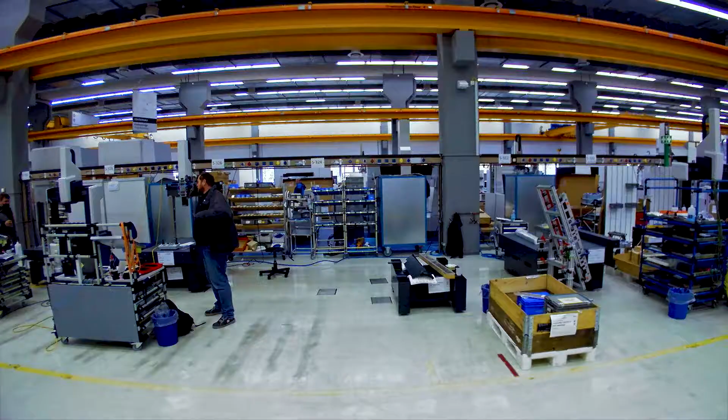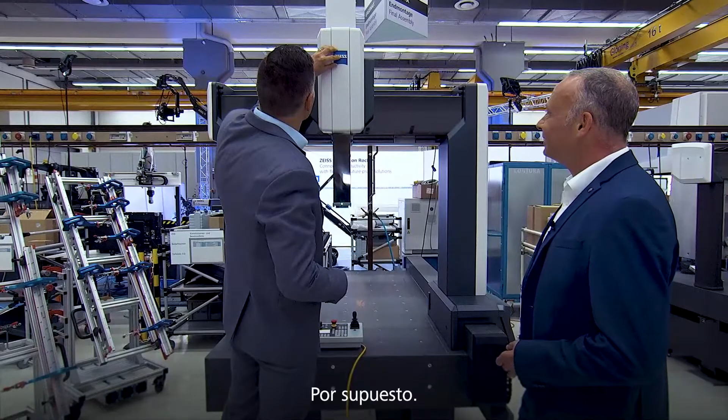Wow, pretty cool machine, I'd say. Yes, but a detail is missing. All right. Oh, you are right. Can I do it? Yeah? Sure. Cool. Yeah, now it's perfect.

Hello, everyone. I'm here with the person responsible for this assembly hall, Mr. Alex Pichinets. Hello. And we're standing in front of a machine that we have just seen being built in a time-lapse video. Alex, what machine is this one? This is a Contura. This is one of the top seller machines that we build for the European market and send out to the customers.

And as we are standing inside an assembly hall, what assembly hall exactly is it? This is the assembly hall in Oberkochen, at the headquarters. And how many of these machines do you produce inside this assembly hall? 60 per month. Not bad at all. And what makes this assembly hall so special?

Oh, they have a special environment that allows us to build this kind of machines, with a special temperature and humidity. Okay. And what was the biggest project for this assembly hall? Oh, I think this was last year, making it digital for the workers and making it paperless for the workers. They now have the possibility to do all the things with digital tools here in the assembly. All right. So you kind of optimized the production, right?

Right. And speaking of production, the whole production team of our Innovation Rocks is waiting for me in the studio, so I have to go. Thank you very much, Alex. Be a pleasure. And you guys, you come with me.

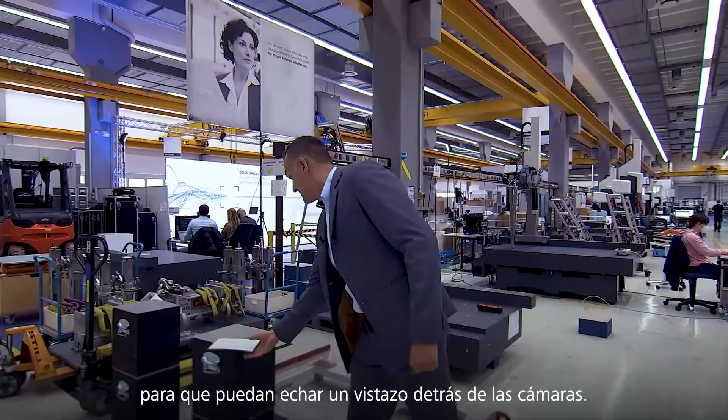So now I'm on my way into our studio, and it's cool that I can take you with me so you can catch a glimpse of what's behind the scenes. My cards are ready. I am ready. Let's check if all the guys over there are ready. So hello, everyone. How are you doing? Good? Perfect. You guys are ready?

Well, ladies and gentlemen, welcome back to the spring edition of ZEISS Innovation Rocks 2021. My name is Pietro, I'm your host, and this is rock number 2. Yesterday, we kicked off this year's edition by talking about a completely new level of simplicity in CT technology. I hope that you enjoyed both the show and the webinar.

In this rock, we will talk about quality assurance, which usually is part of production processes, as basically everyone needs to ensure the final quality of their products. But sometimes this very step can turn into a bottleneck. In this show, along with our ZEISS experts, we will learn how to use quality assurance to our advantage. And of course, a series of interesting demonstrations won't be missing either, with our demonstrations master Jay, of course.

The title and the topic of this rock is 'Unleash Hidden Efficiencies in Manufacturing Processes,' and my guests will explain how to achieve exactly that. So let's welcome the first one. He is the head of product management. Please welcome Maximilian Wiedemann.

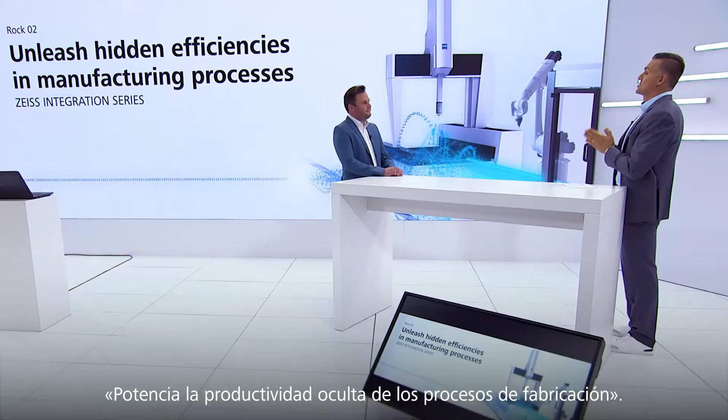Hello, Maximilian, and welcome to the show. Hi, Pietro. Thanks for having me on the show. I have just mentioned the title of this rock, 'Unleash Hidden Efficiencies in Manufacturing Processes.' Basically, what exactly does that mean?

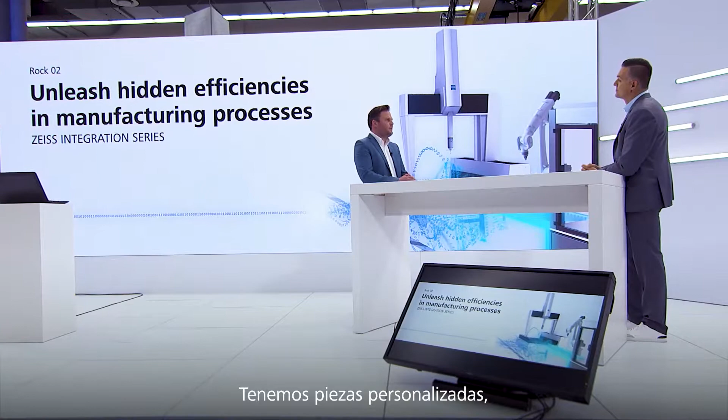Yeah, Pietro, if we compare the production processes that we have today to the ones in the past, we see a huge difference. On the one hand, we have a trend towards individualization, so we have customized parts, configurable parts like you see in cars or even in the medical sector. We nowadays produce parts that specifically fit your personal body. And on the other hand, we have high volume series production with maybe a requirement of 100% control, like we have in the medical sector. So this requires that quality assurance is flexible, but also very fast.

So this means we need powerful measurement equipment, that's for sure, no doubt about that. But if we talk about integrated quality in production, we really strongly focus on the processes around it - how is a part being loaded and how do we handle the respective data? All right, well, makes sense. And I know that you have brought a little sneak peek. So let's have a look together.

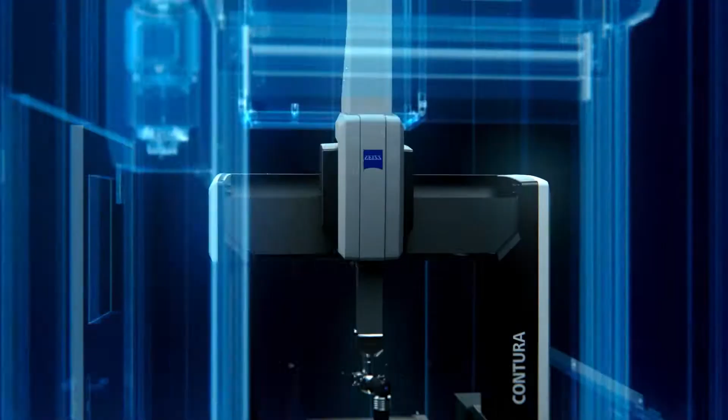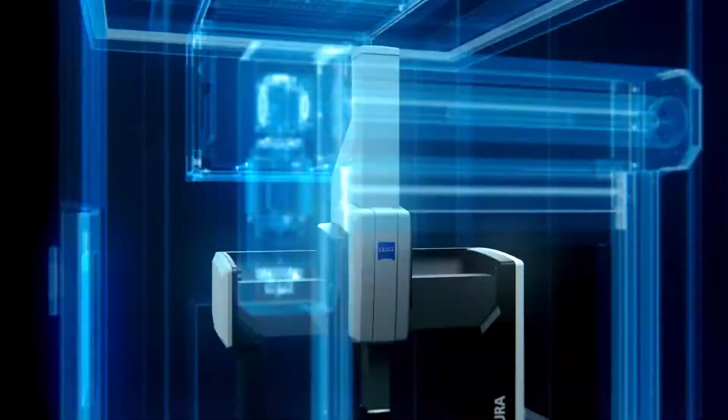The ZEISS Integration Series and the integrated quality it provides.

What would you say is the main benefit of it? With the ZEISS Integration Series, we bring the production world and the metrology world together, and this gives huge benefits to our customers. We significantly reduce the measurement cost per part. We give direct feedback of the results into production, where we're also able to automatically compensate the tooling machines, and we prevent rejects and rework. That gives a huge benefit in terms of sustainability. Summarized, integrated quality is a multiplier for added value.

All right, well then let's have a look together at what all of this looks like.

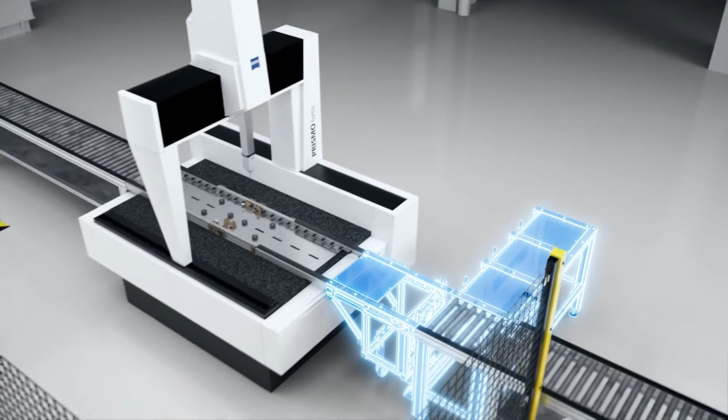Efficiencies unleashed - nice claim. Maximilian, what exactly have we just seen in this video, and what exactly is the ZEISS Integration Series? What we saw in the video is how inefficiencies can appear basically everywhere, in the metrology room, at line, or even inline.

And we provide solutions for our whole product portfolio, for CMMs that can directly be installed in the production area and also in the metrology lab. All of those CMMs, like the Duramax, the Contura and the Prismo, and also our entire optical series, are used because of the specific technical demands of our customers.

It is split into basically four categories. The first one is the loading category, that contains all loading systems, manual ones or automated ones. Then we have the operating category, where we find all products in order to efficiently integrate your systems and the data at the place where it's needed.

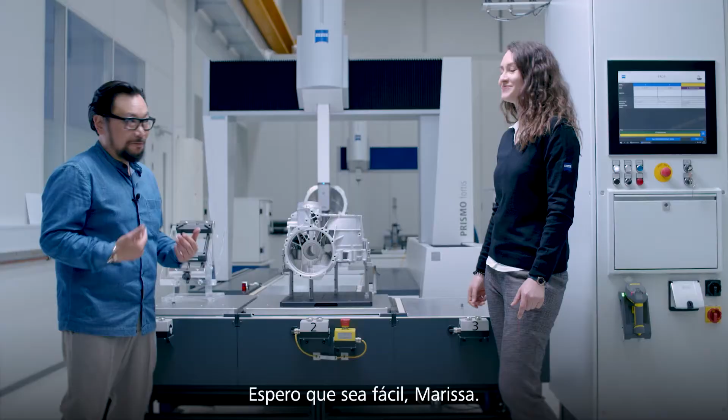Okay, this better be easy, Marissa, because... Yeah, I think you will manage. So we just tighten it a little bit, right? All right, looks good, okay, it's in. How do we put it in the queue?

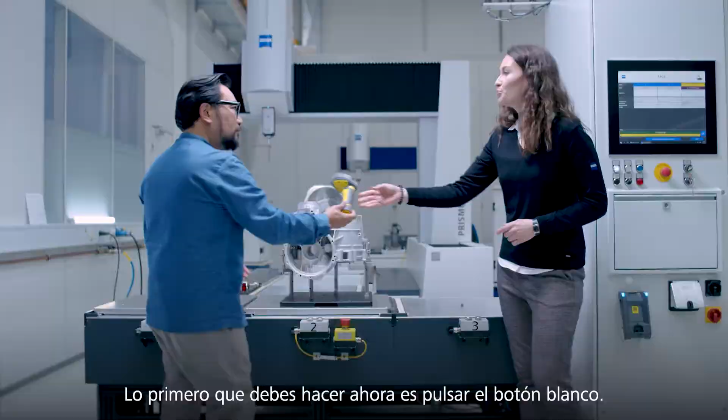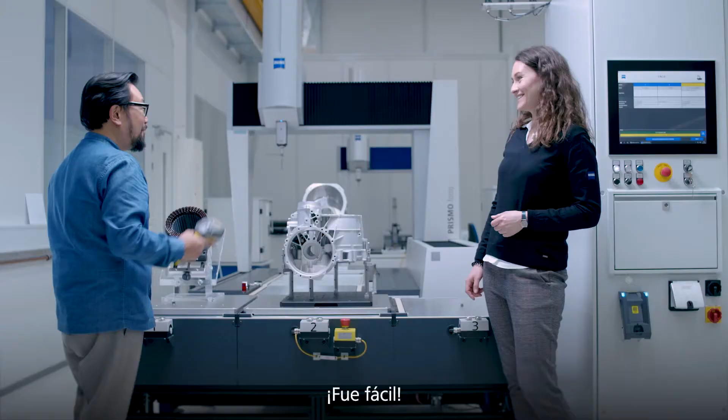Now I will give you the scanner. Okay, first thing you have to do is push the white button, then scan the DMC code, and then push the white button again. Well done, and that's it already. It's in the queue? Yeah, that's it. Wow, that was easy enough for me to do.

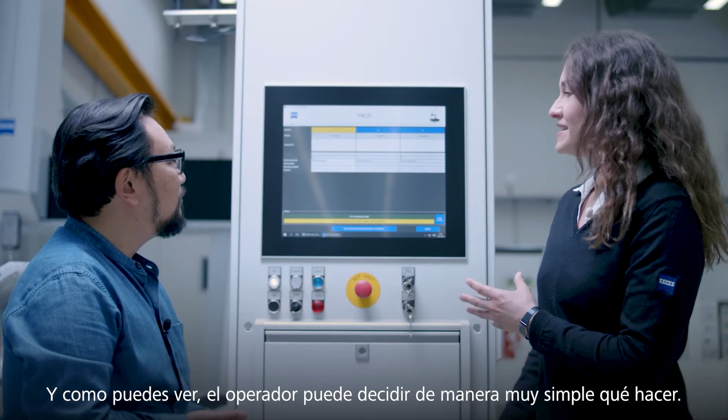What else can we have a look at? Yes, of course, the software, if you have a look here. So we have FACS, it's the HMI for the system. And as you can see, it's really simple for the operator to decide what to do. So we have first, second and third station, like the pallets you can see there.

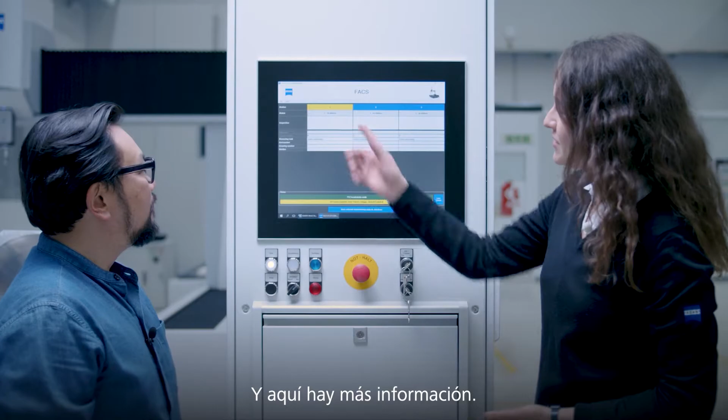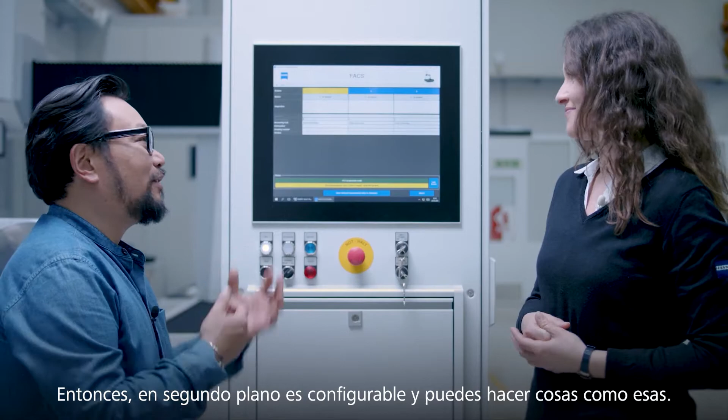And here's some more information. There's also the option to look for an interface with ERP. So in the background it's configurable, you can do things like that. Yeah, perfect, but customized. Customizable, but yet really simple to use.

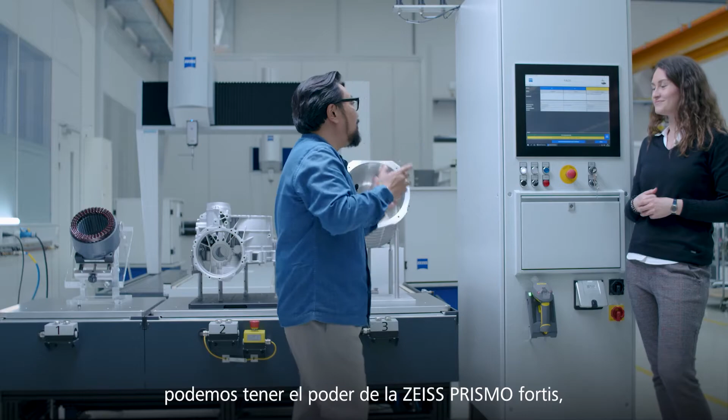So what I think I'm seeing is we're having the ability to have the power of a Prismo Fortis on the shop floor, but we're going to boost efficiency by being able to queue up machines in an interface that's simple enough for anyone, even me, to use, right? Yeah, that's true. Because of that, we have time optimization for the operator, and the cost per part per measuring time really gets low. And as you can see here, the part you put into queue is being measured.

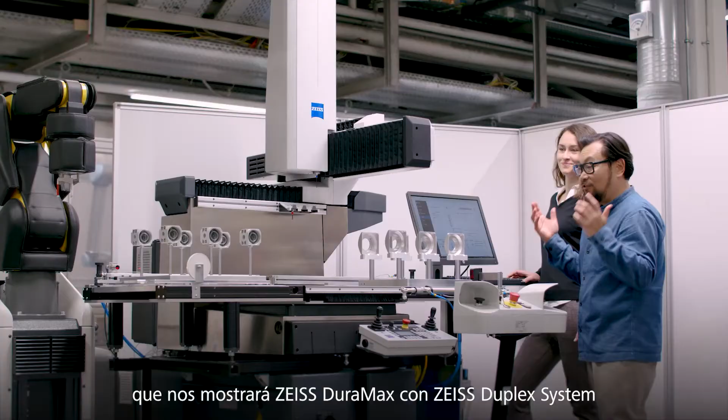And we do this without having any project effort, without any programming, just by click, easy as that. Okay, and we have got Marissa and Jay ready to demonstrate the automating functionality too. Marissa and Jay, welcome back. We're here with Marissa, who's going to show us the Duramax with duplex system and automation interface. Did I get that right? Yeah, perfect, let's have a look.

So this Duramax actually has an easy plug-in automation interface. And here we have a look at the web-based HMI software. You can configure it through that software, so this is a huge advantage. And here in this drop-down menu, I can easily select how many pallets we're having. Here it's 2. Exactly, right? Okay, and here I just choose the priority of the movements.

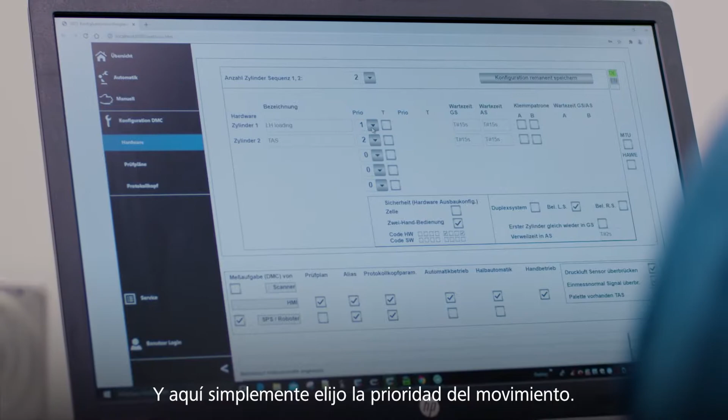So if you like, I can show you. Okay, can I do it? Sure, yeah. So what do I do? Just press the buttons. Both of these? Both at the same time? Yes, at the same time. Oh, that's very safe. There you go.

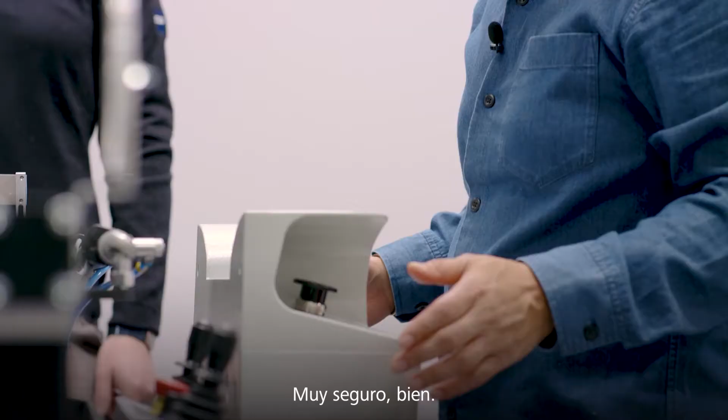All right. Now the CMM starts measuring and it goes from one part to the other, and afterwards this pallet will be starting to measure.

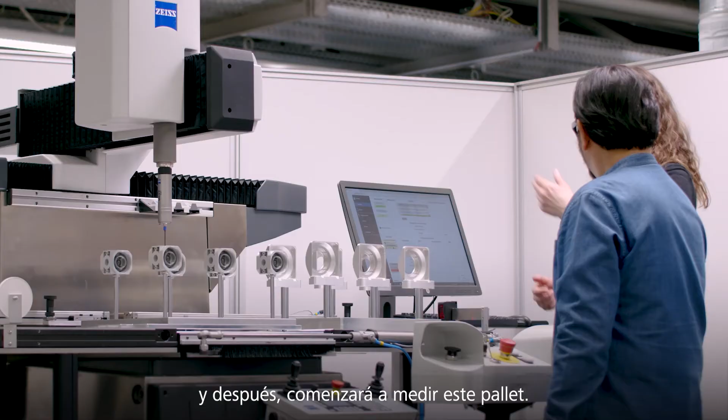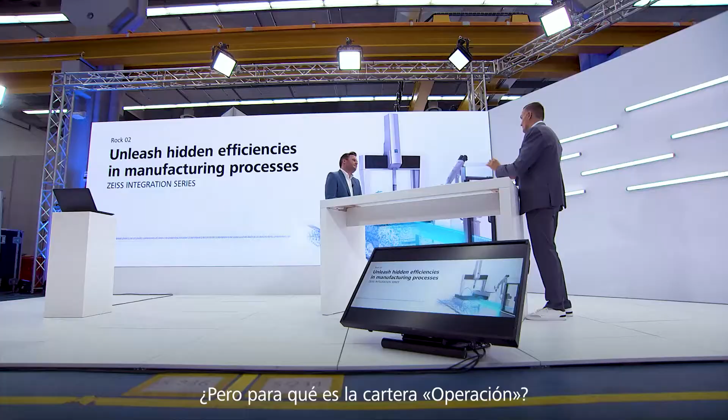Well, Maximilian, we have just seen loading and automating, which is pretty clear now. But what is the operating portfolio for? Yeah, the operating portfolio pretty much allows you to use your CMMs where they are needed, where production happens, and to use your data where it is needed.

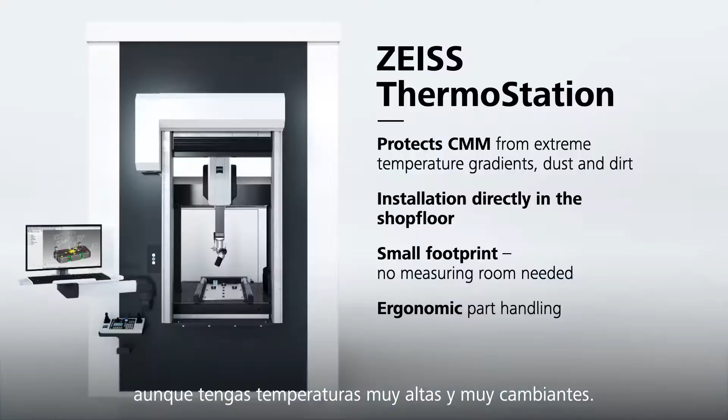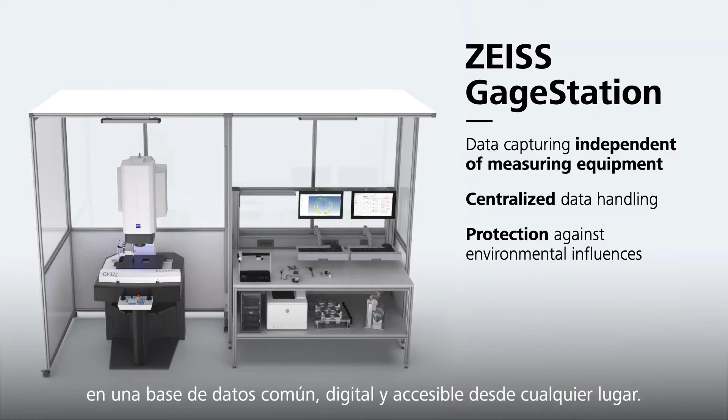So we are actually launching 2 new products within this category. We have the ThermoStation that enables you to place your CMM directly into production, even if you have very high and very changing temperatures. And we also launched the GageStation that connects your results of multi-sensoric CMMs and also your results of hand gauges in one common database, digital and accessible from everywhere.

But right now, to be honest, I do not want to tell you too much about this, because we prepared 2 demos and very detailed information that we want to show to our audience in the following webinar.

In the following webinar, good point. Well, we have seen demonstrations with standard products, let's call them like that. But what if the shape or the size of my product doesn't fit the line? Mm-hmm, I guess there is a way to customize the whole thing, isn't there?

Yeah, exactly. So I would like to talk to a colleague of mine who is an expert in selling those customized solutions, and he should be somewhere around. Here he is. Hi, Pietro. Thanks for having me. You're welcome.

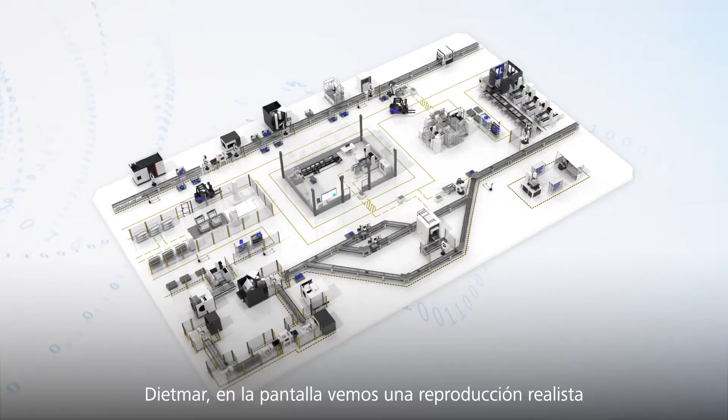Dietmar, on the screen now we see a realistic reproduction of a typical shop floor. Would you please describe it?

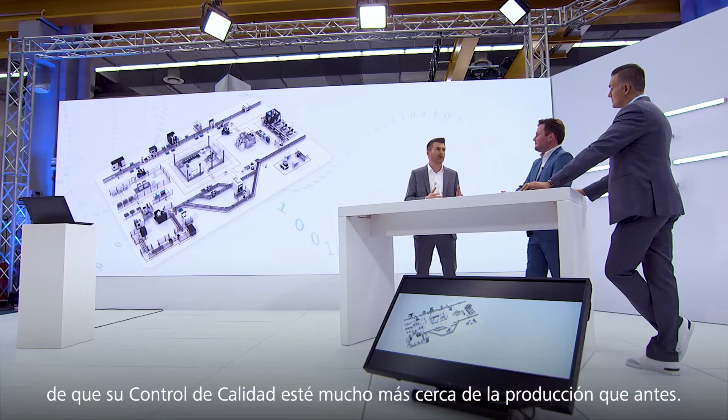Yes, of course. This map gives you a very good overview of what is possible in today's production when we are talking about ZEISS integration series and customized solutions. You can see that we have integrated most of our ZEISS measuring machines out of our portfolio, either inline, at-line, or offline inside of the production. With this move, we are giving our customers the possibility to move their quality assurance much closer to the production than in the past. As a result, this will lead to three major benefits: higher productivity, more efficiency, and faster results for process control. Let's zoom in on some examples.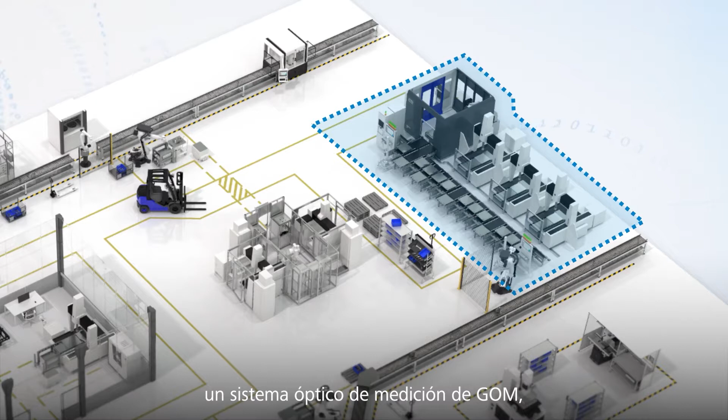In the first picture, you can see an optical measurement system from GOM, the ATOS scan box, connected to 3 Prismos through a 14-station automated shuttle loader. The biggest advantage of this system is the combination of a very fast optical system and a very precise tactile system.

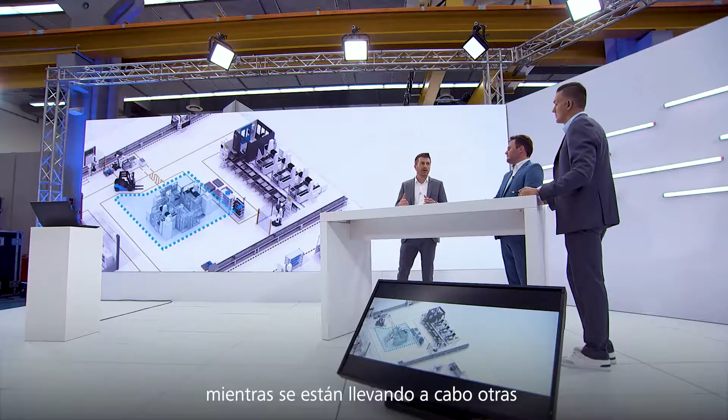In the next picture, you can see an offline station, fully automated with a robot inside. There are 2 CenterMax and 2 shelves, on the left and on the right side. In this system, you can load and unload parts while other measurements are running fully automated at the same time. And even in the night shifts, you can leave the machine running fully autonomously when you fill up the storage before you leave.

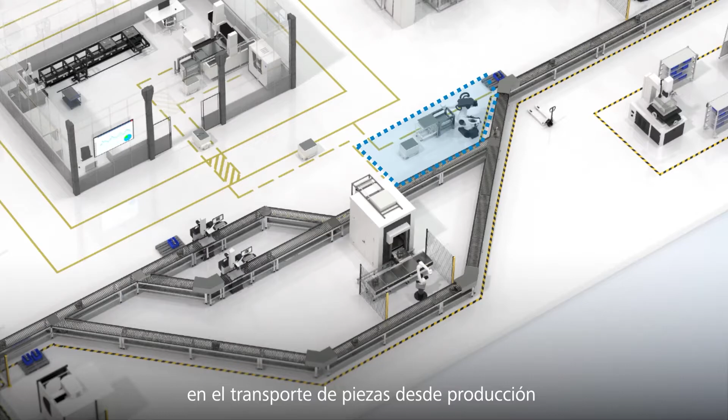Last but not least, we are gaining more and more experience in transporting parts from the production to our measuring machines with an AGV. We can either deliver such a system as a turnkey solution out of ZEISS, or we are quite flexible to implement interfaces for already existing AGVs from different suppliers.

Well, I can imagine that the setup of a comparable project could be very complicated and very time consuming. Am I right? Yes, you are absolutely right.

For example, we just recently opened a new ZEISS Integration Series hub in the US, in Wixom. So also here, our specialists can deliver such customized solutions or also products from our integration series to the customers in the US.

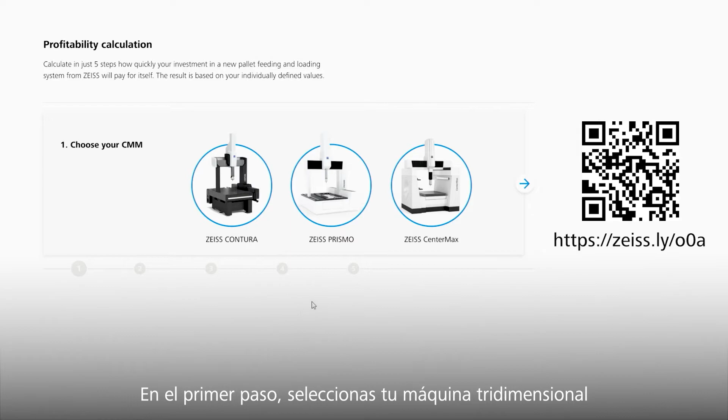Okay, it's a really easy 5-click configuration tool that we did. In the first step, you just select your CMM depending on your technical requirements, and you enter all your specific values on the next pages.

For example, 280 working days, work per week of 40 hours, working in a 3 or 2 or 1 shift operation. In this case, we just select 2 shifts. And last but not least, we enter the average salary of a machine operator.

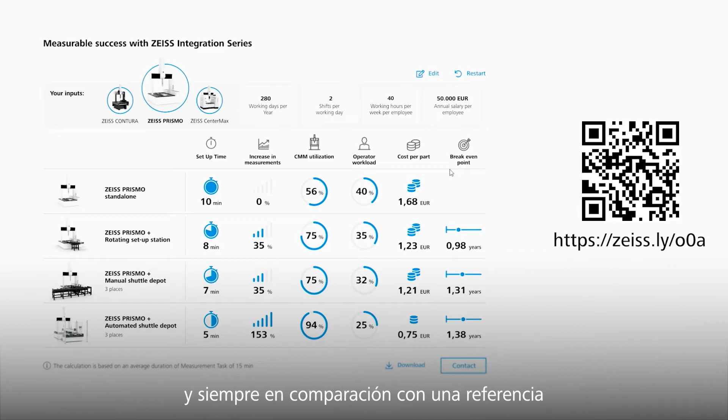So then we calculate it. What you get is a detailed overview of the different solutions we have in the ZEISS Integration Series portfolio, and also always in comparison to a reference, which is the standalone CMM you selected in the beginning.

So in this case, we see that we have a significant increase of the amount of measurements. So we have a higher throughput of parts, we have an increase of the CMM's utilization, and at the same time, we decrease the operator's workload and the cost per part. So in the last column, you see we have an amortization of under 1 year, which really gives you a basic orientation of what we are talking about.

Maximilian, on the last line, I see 94% machine utilization, which is pretty good, isn't it? Yes, it is. And there is the big sustainability aspect. Since we have maximum machine utilization, we do not waste any energy for standstill times.

And we can reduce rejects and waste up to 100%, like, for example, you heard from Mr. Heckel before. So, as far as I understand it, what we have here is a system that not only pays off quicker than expected, but also boasts remarkable advantages in terms of sustainability and the environment. A classical win-win situation. Correct.

And we want to go even more in detail in our following webinar.